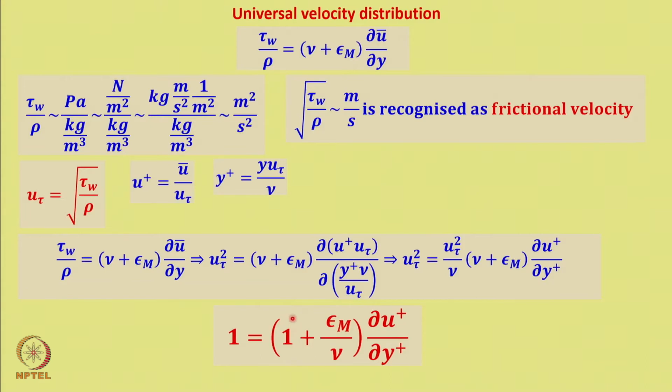Tau wall by rho equals nu plus epsilon m, del u bar by del y. We replace tau wall by rho with u tau squared, and del u by del y in terms of u plus and y plus, and we got this relation. The first term represents the laminar shear stress and the second term represents the turbulent shear stress.

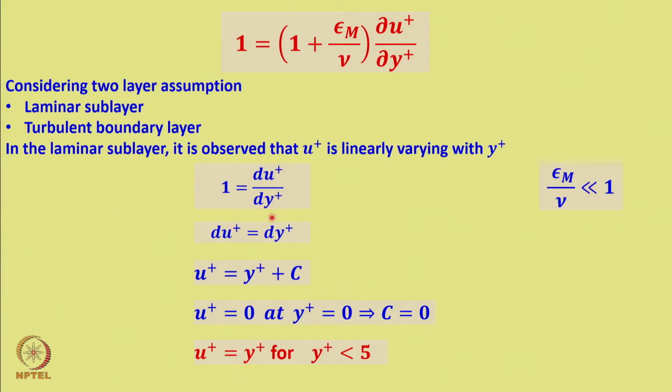For laminar flow, we took a two layer assumption. We took the laminar sublayer and set 1 equal to du plus by dy plus, integrated that, and got u plus equal to y plus.

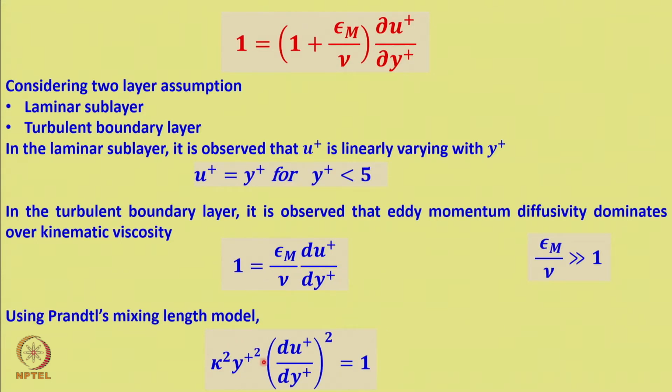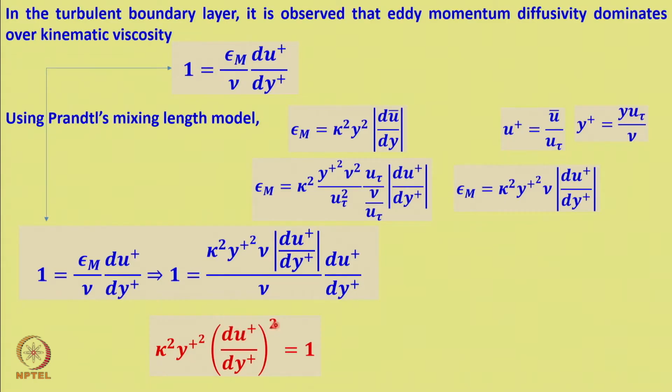For the turbulent boundary layer, we replaced epsilon m with the Prandtl's mixing length hypothesis, that is, epsilon m equal to kappa squared y squared du bar by dy, and replacing that with y pluses and u pluses, we get kappa squared y plus squared nu du plus by dy plus. Substituting this epsilon m in the equation and rearranging, I get kappa squared y plus squared du plus by dy plus, whole squared, equal to 1.

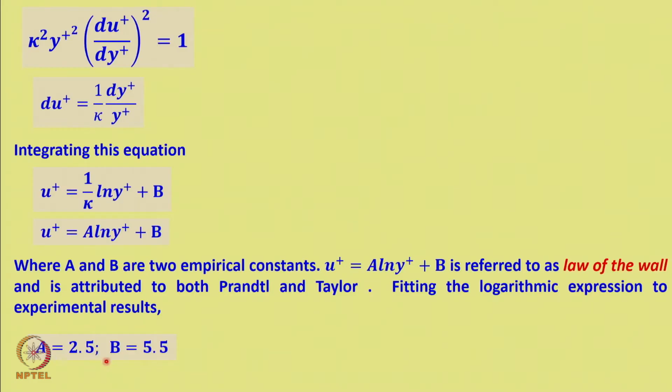If I square root it, I get this equation, and integrating that, I get u plus equal to A log of y plus B, where 1 by kappa is termed as A. So if I take two layers, I get A equal to 2.5 and B equal to 5.5.

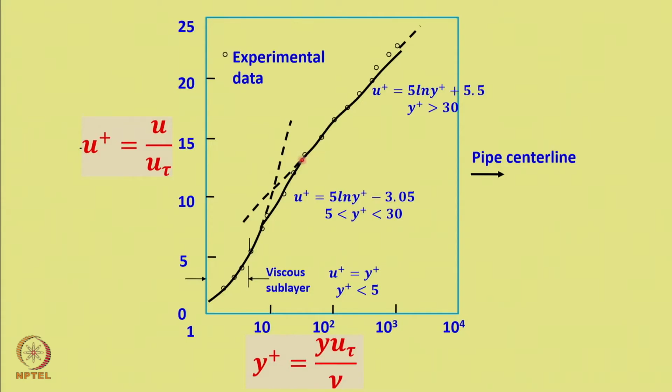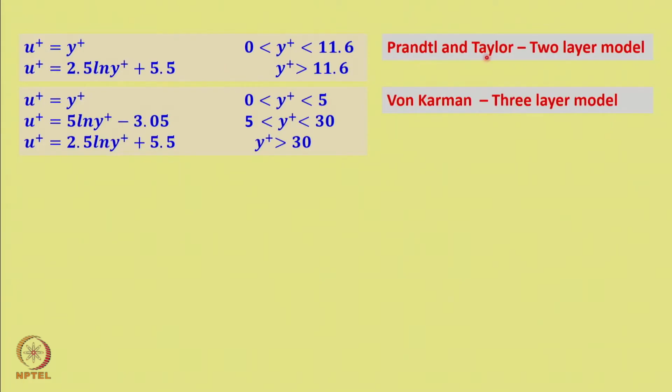This is called universal because it's valid for both internal and external flows. Prandtl and Taylor suggested the two layer model, and Von Karman refined this with the three layer model.

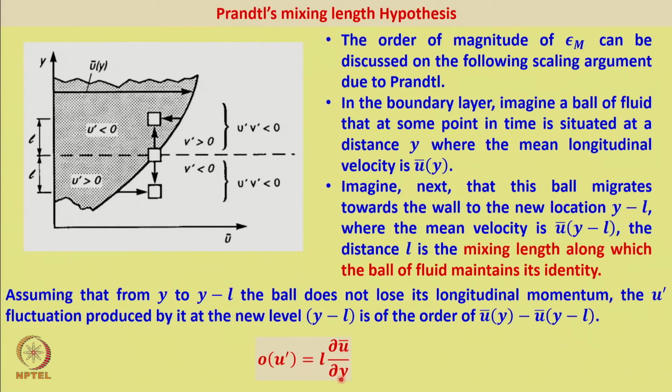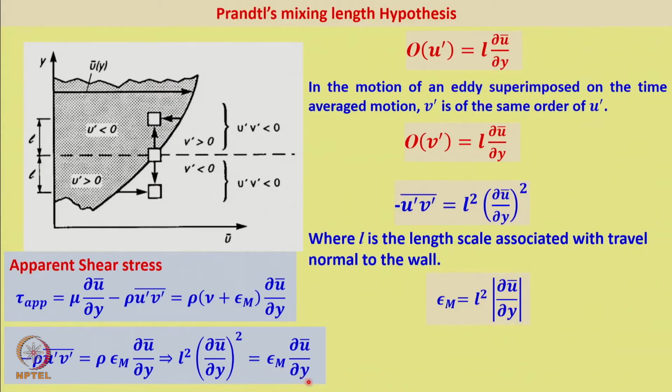In Prandtl's mixing length hypothesis, we said u prime is of the order of L del u bar by del y, and v prime is of the order of L del u bar by del y. So u prime v prime is of the order of L squared del u bar by del y whole squared. Substituting that for epsilon m del u bar by del y, I get epsilon m equal to L squared del u bar by del y.

What should be the scale for L? There is no general rule, but it should be of the order of y, so I write L equal to kappa y. Substituting that, for L squared I get kappa squared y squared, so epsilon m equals kappa squared y squared del u bar by del y.

From experiments, it turns out that kappa is of the order of 0.4, which reconfirms the upper bound for the mixing length.

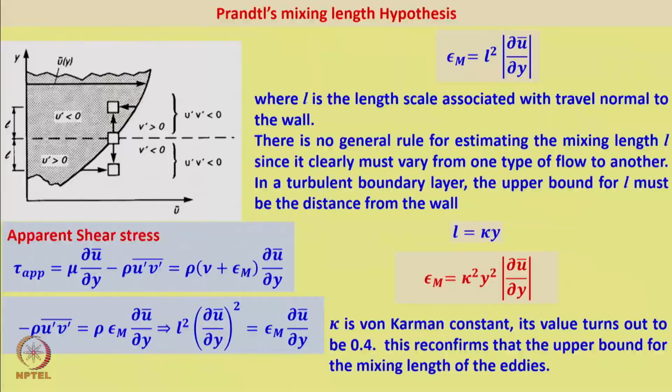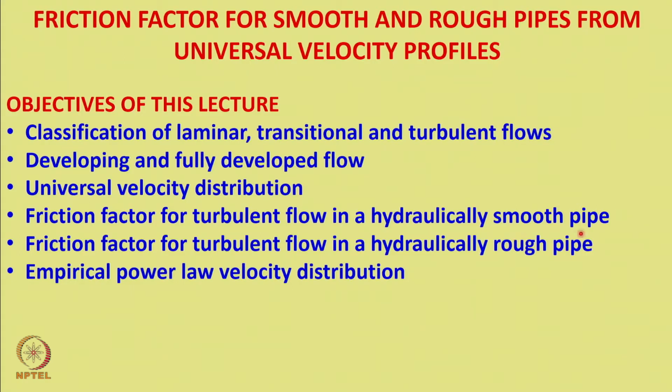Now let us see the plan for the next lectures in this module: we will try to derive the friction factor. Coming to the slides, the objectives of this lecture are to quickly take up laminar, transition, turbulent, developing and fully developed flow, briefly revisit the universal velocity distribution, and derive the friction factor for turbulent flow in a hydraulically smooth pipe. That is the aim of this module.

So we have laminar, transitional, turbulent, and developing flow where the boundary layer is growing until it reaches the center of the pipe—that is called the hydrodynamic entrance length. In the fully developed flow, if it is laminar, the profile would be parabolic; if it is turbulent, it would be a top hat profile or power law.

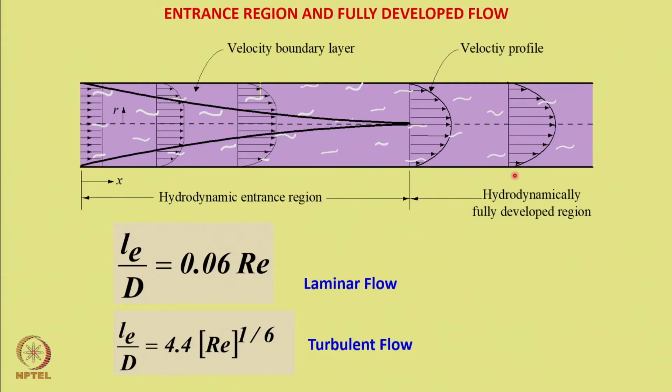So I am going to consider the turbulent velocity profile. In previous classes, Professor Arun taught you how to derive F equal to 64 by Re for laminar flow from the Navier-Stokes equations. Here, we are going to derive it for turbulent flow.

This is just to show the entrance length, and this is the fully developed flow where dP by dx is constant. So the shear stress is quite different between laminar and turbulent flow.

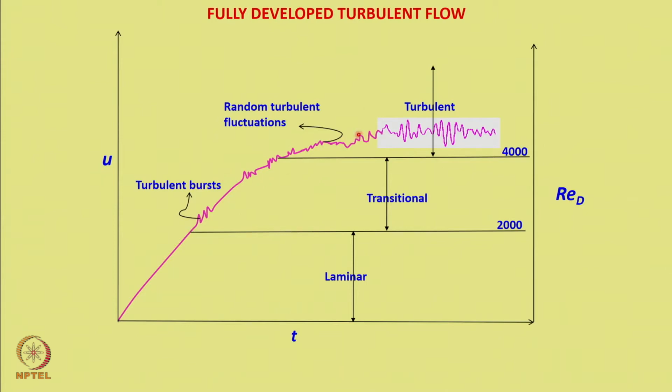We are going to derive F for turbulent flow. This is just to show velocity versus time, where turbulent bursts are present, and in turbulent flow, for Reynolds number greater than 4000, the flow is going to be turbulent.

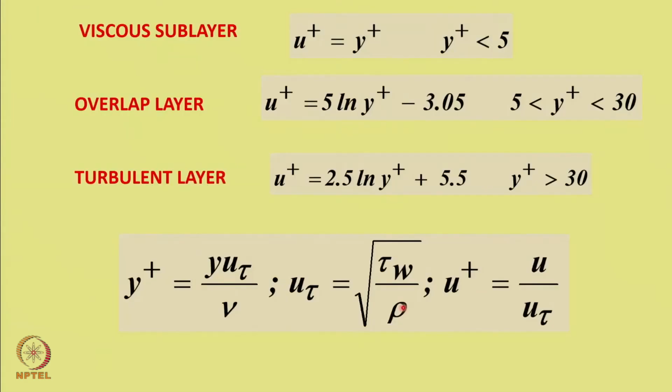So we have gone through this universal velocity profile, which we took up and compared with the experimental data. Now we shall take up the friction factor for turbulent flow.

Friction factor for turbulent flow in a hydraulically smooth pipe. Of course, I have not told what is a smooth pipe yet. Let's consider that there is no surface roughness. For now, let us take this as smooth pipe means there is no surface roughness at all, like a perspex pipe or a glass pipe, you can consider there is no surface roughness. I will define formally after this derivation what is hydraulically smooth and hydraulically rough pipe.

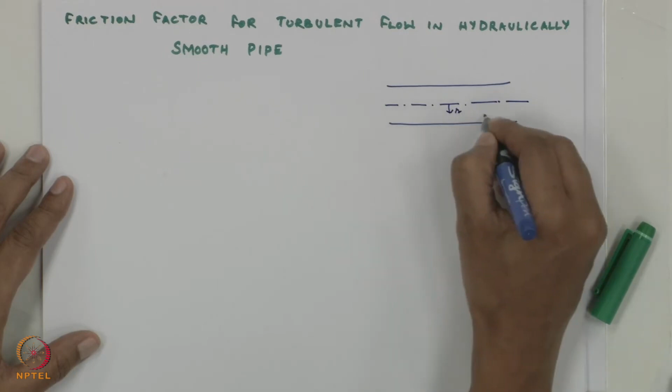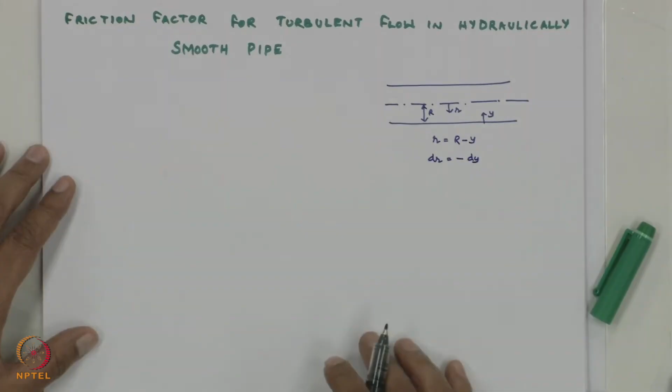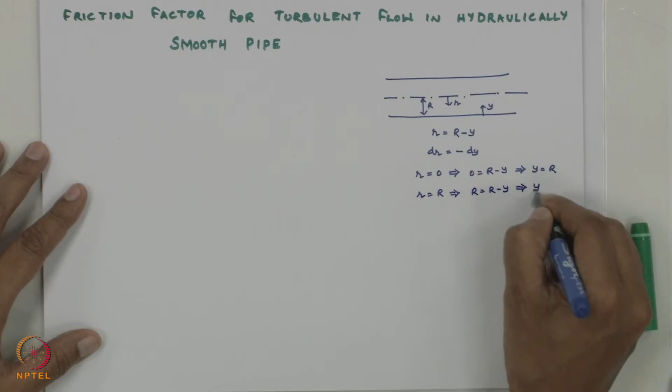So if I take a pipe, this is the r coordinate and this is y coordinate, and this is the radius of the pipe. Now r equals capital R minus y, and dr equals minus dy. When r equals 0, this implies 0 equals R minus y, that means y equals R. And at r equals R, this implies R equals R minus y, implies y equals 0. This is for transformation of coordinates.

So now flow rate Q dot equals pi R squared u average, area into velocity. This is volume flow rate, volumetric flow rate is what I have taken, that is why density you do not see. This is equal to integral of 0 to R, 2 pi r u dr.

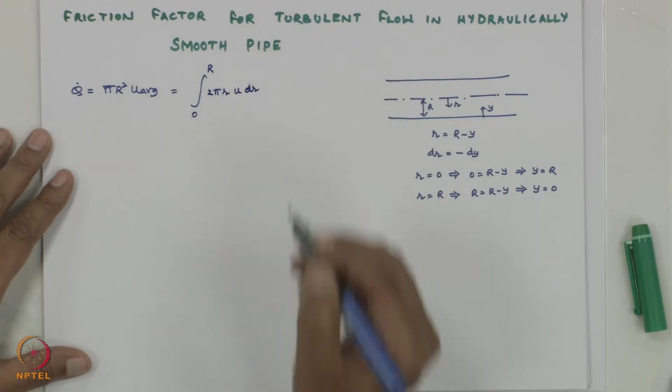How did I write this? I have taken a small elemental ring in my pipe at a radius r. This elemental ring has a thickness dr. So the area of this elemental ring is 2 pi r dr multiplied with velocity, integrated within the limits 0 to R, is my flow rate.

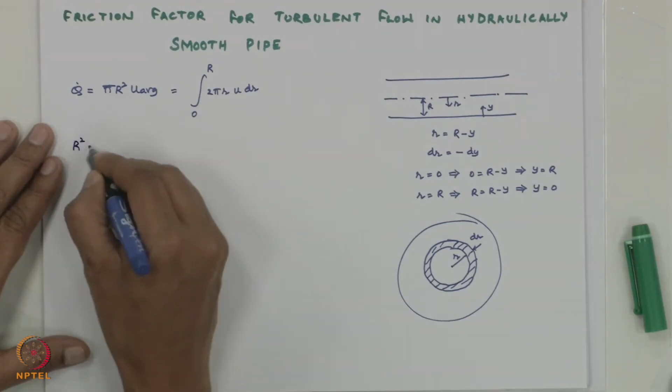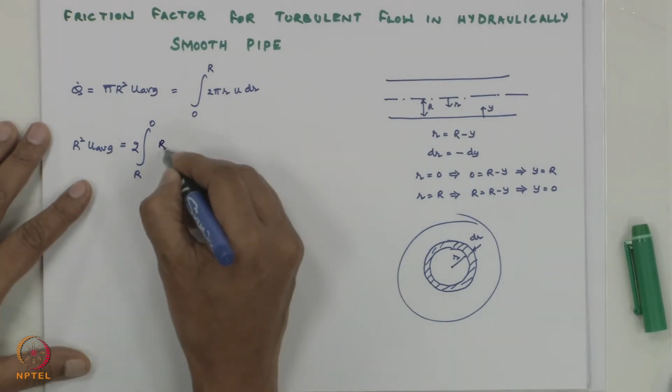Now R squared pi gets cancelled out, so you have R squared u average equals integral of, I am transforming this r into y. So when r is 0, y is R, and when r is R, y is 0. 2 I am pulling out, u I will retain as it is, small r becomes capital R minus y as I have shown here already, and dr is minus dy. I will absorb this negative sign by flipping these limits. So R squared u average equals 2 into integral 0 to R.

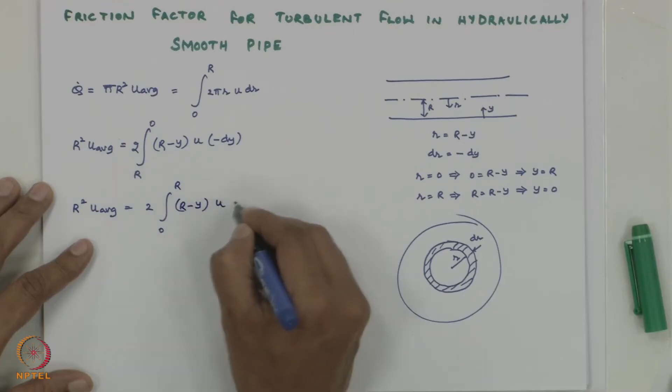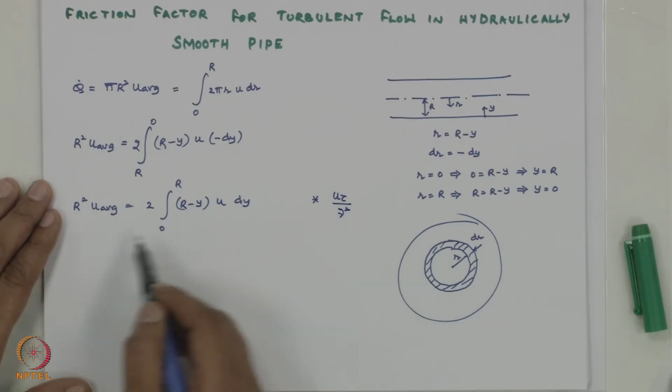Minus y, u, dy. Now multiply both sides by u tau by nu squared. My next aim is to convert this, transform this in terms of u plus and y plus. Let me tell you what I am doing.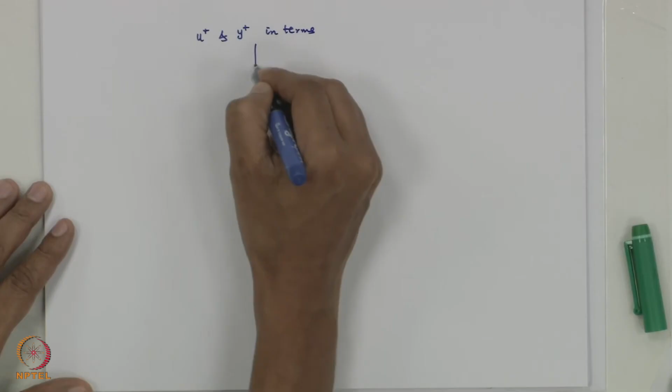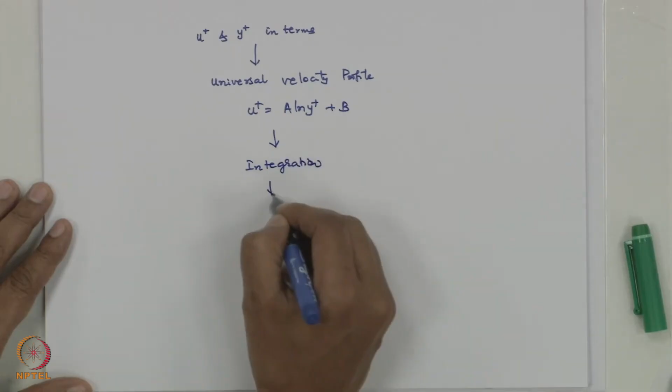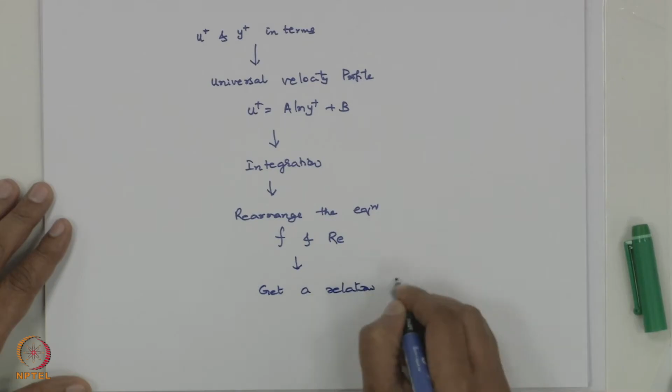I will convert this into u plus and y plus. In terms of u plus and y plus I will write, and take the universal velocity profile, that is u plus equals A log of y plus plus B, do the integration, rearrange this equation in terms of f and Re, where f is friction factor, so that I get a relation for f. This is my whole algorithm, if you want to say, what I am following to derive this.

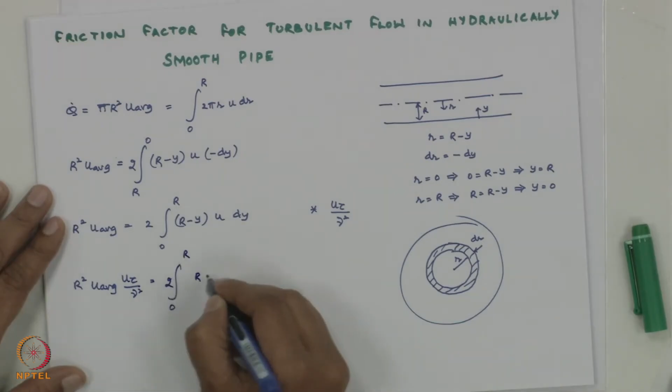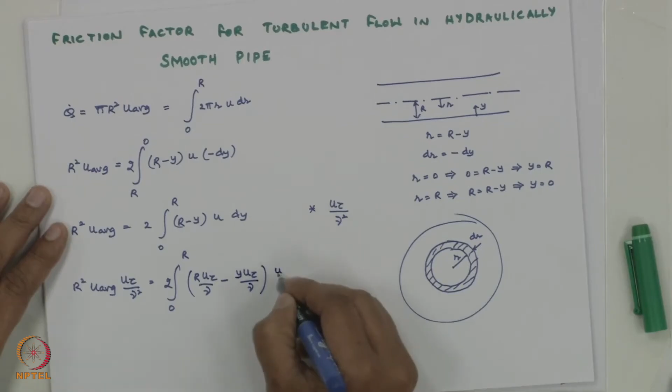Getting back, so I want to write this in terms of U plus, so that's why I am doing a little bit of rearrangement. So R squared U average U tau by nu squared equals integral of 0 to R, 2 is outside, R U tau by nu minus Y U tau by nu, into U by nu dy. Let it be there like this.

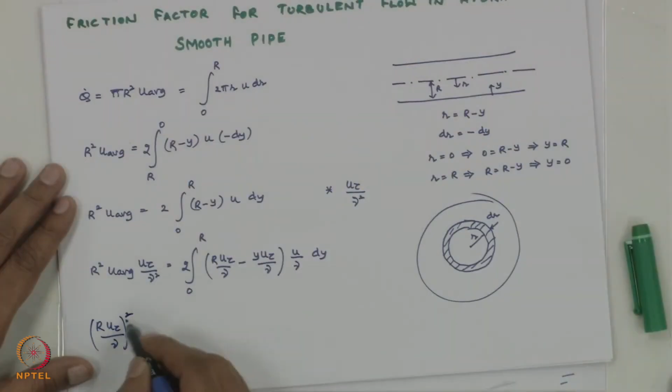Okay, now again, R U tau by nu whole squared, so I have to divide by U tau. You see, I had only one U tau in the numerator, only one U tau, but I have put two U taus in the numerator. That means I have to put one U tau in the denominator.

So this is equal to 2 into integral 0 to R, R U tau by nu minus Y U tau by nu, U by U tau, d of Y U tau by nu. What did I do? This U tau is constant, so it gets cancelled out; nu was there, that nu I have pushed inside. So everything is okay.

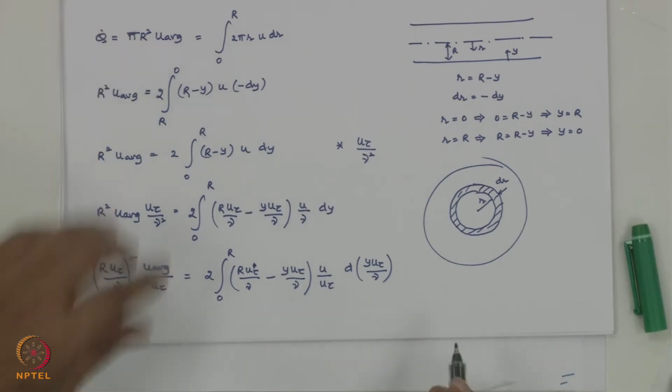Now you can see everything in terms of pluses. So if you recall, what is Y plus? Y plus equals Y U tau by nu, R plus equals R U tau by nu, and U by U tau is U plus. Correct? Substituting this,

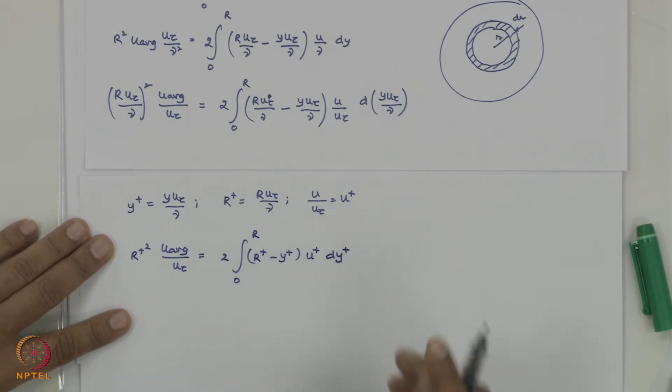what do I get is R plus squared U average by U tau equals 2 integral of 0 to R plus, minus Y plus, U by U tau is U plus, Y U tau by nu is Y plus, so dy plus. So I have successfully converted this within the integral as all U plus and Y plus only. So what was U plus? U plus equals A log of Y plus plus B, where A equals 2.5 and B equals 5.5.

Let me keep it as A and B only for now, and substitute the values of A and B at the end. Now, R plus squared U average by U tau equals 2 into the integral from 0 to R plus of R plus minus Y plus, U plus is A log of Y plus plus B, dy plus.

Now you multiply this out. There's a bit of bookkeeping, but let's do it - I don't want to skip steps. R plus squared U average by U tau equals 2R plus A. If you integrate log x, you get x log x minus x plus c, so you have Y plus log of Y plus minus Y plus within the limits 0 to R, and this limit becomes R plus.

Minus 2A. Now for the x log x integration, you get 2A into Y plus squared by 2 log of Y plus minus Y plus squared by 4.

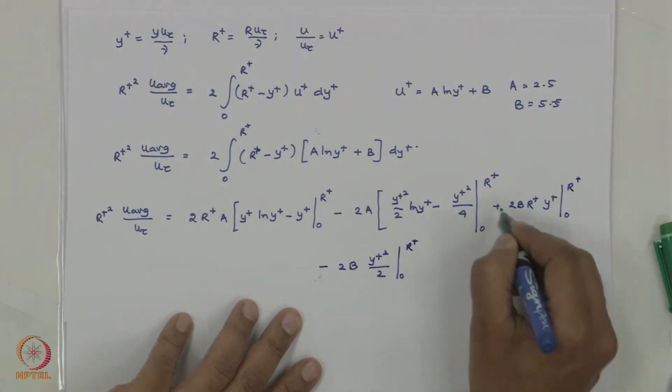So it's simply bookkeeping, but I don't want to skip it because there are subtle nuances in between, so I need to focus on that.

So R plus squared u average by u tau is equal to 2R plus A into R plus log of R plus minus R plus, minus 2A times R plus squared by 2 log of R plus minus R plus squared by 4, plus 2B R plus squared minus 2B R plus squared by.

So for u average, you can see that r plus squared will vanish throughout. So I can write u average by u tau equals 2a log of r plus minus 2a minus 2a times 1 by 2 log of r plus, plus 2a times 1 by 4, plus 2b minus b, 2b into half b.

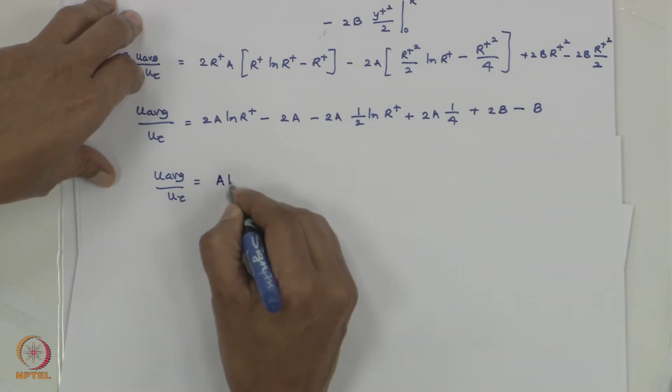So I get my equation as u average by u tau equal to 2a log of r plus minus a log of r plus. So you get a log of r plus minus 2a plus a by 2, so you get minus 3 by 2a plus 2b minus b, you get plus b.

Substituting a equal to 2.5 and b equal to 5.5, you get u average by u tau equal to 2.5 log of r plus 1.75. You just substitute for a and b, you are going to get this 1.75.

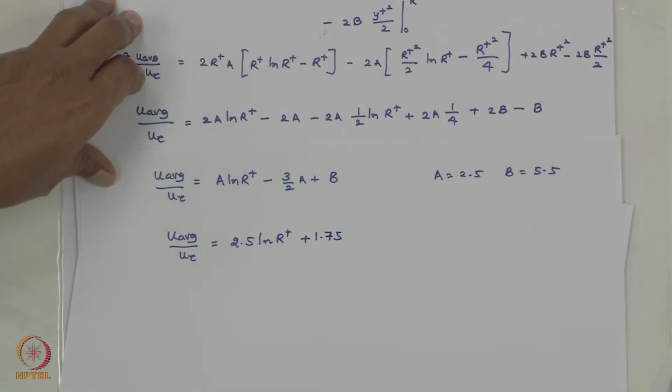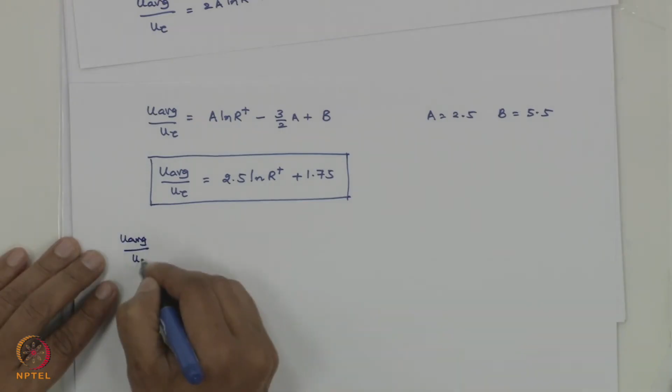Now still I am not seeing Reynolds number and friction factor, right? So let me take up only the left hand side of this equation, that is u average upon u tau. Now u tau is nothing but square root of tau wall by rho. So now 1 upon square root of tau wall upon rho u average squared.

I have just taken the u average in the denominator. So if you recall, Cf equal to tau wall upon half rho u average squared - that is my definition of Cf. So that means this becomes square root of 2 by Cf.

2 by Cf, that is tau wall by rho u average squared is equal to Cf by 2. So that is Cf, but F equal to 4 Cf. So if you substitute that, you get 8 upon F. This is my regular friction factor which comes from my Darcy-Weisbach equation.

If you want to recall, Hf equal to Fl V squared divided by 2Gd. So that is rho GHf, that is delta P, rho G, Fl V squared divided by 2Gd. Here V is nothing but U average. So the g's get cancelled out.

So you get F equal to delta P upon half rho U average squared into D by L. This is the friction factor definition, in case you have forgotten.

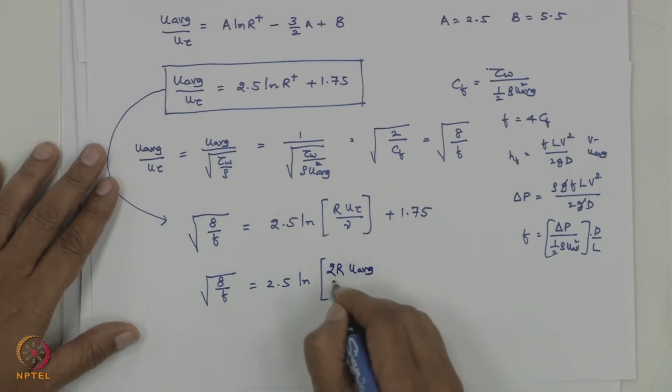So the left hand side of this equation becomes square root of 8 by F equal to 2.5 log of R u tau by nu plus 1.75. So square root of 8 by F equal to 2.5 log of R, 2R u average by nu, into u tau by 2 into u average. I just multiplied and divided it by 2 u average.

2r is nothing but my diameter. Whole of this is nothing but my Reynolds number based on diameter, and u tau by u average - just now we have found that equals square root of f by 8.

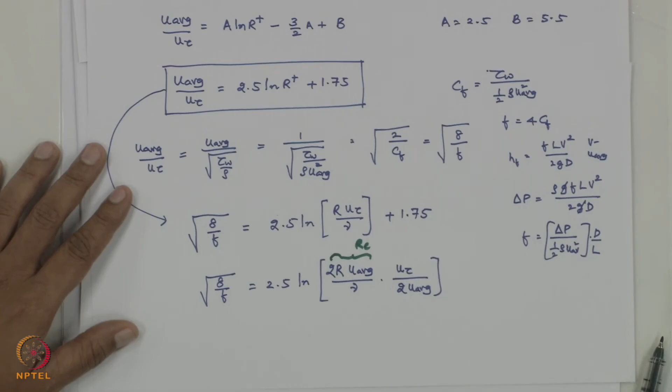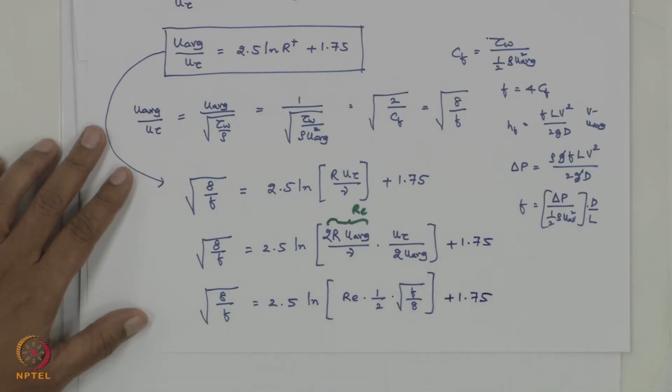So if I substitute that, I get square root of 8 by f equal to 2.5 log of Re into half into square root of f by 8, plus 1.75. So if I divide throughout by root 8, since I want only 1 by root f on my left hand side, I get 1 by root f equal to 2.5 upon root 8 log of Re into half into square root of f by root 8, plus 1.75 by root 8.

So if you do this, you get 1 by root f equal to 0.8838 log of Re square root of f, plus 2.5 by root 8 log of 1 by 2 root 8.

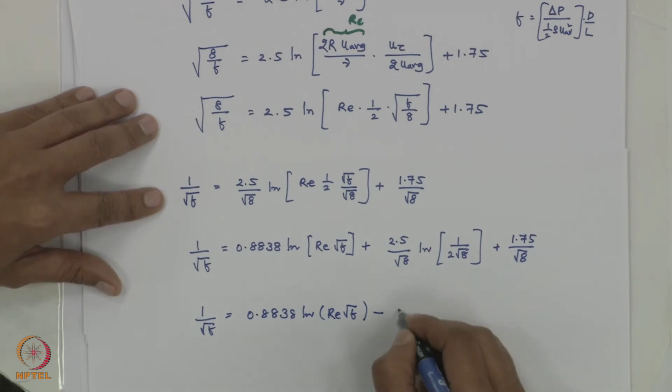I have just taken out these constants, log a plus log b. Log ab equals log a plus log b, I have just put that, plus 1.75 by root 8. So you get 1 by root f equal to 0.8838 log of Re root f equal minus 0.9129, that's what you are going to get.

Okay, so now minus, when you take log and all, you will get this. So where did the minus come from? It comes from log, so you don't have to worry.

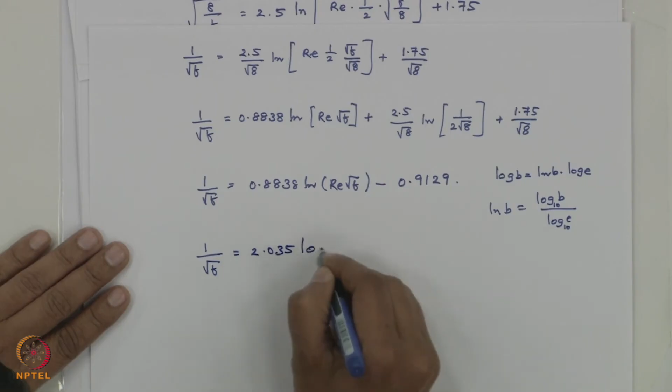But now I want to convert this natural log to logarithm to base 10. So log b equals log b into log e, that is log means to base 10 by log e to base 10. If you do that, you get 1 by root f equal to 2.035 log of Re root f minus.

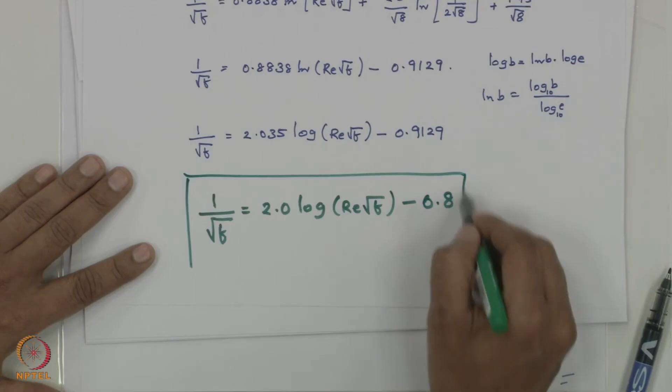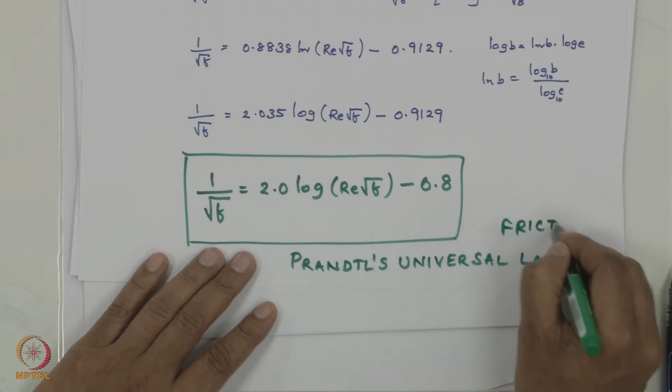This is called Prandtl's universal law of friction, because it is coming from the universal velocity profile, and it has been verified up to 3.4 into 10 to the power of 6 Reynolds number.

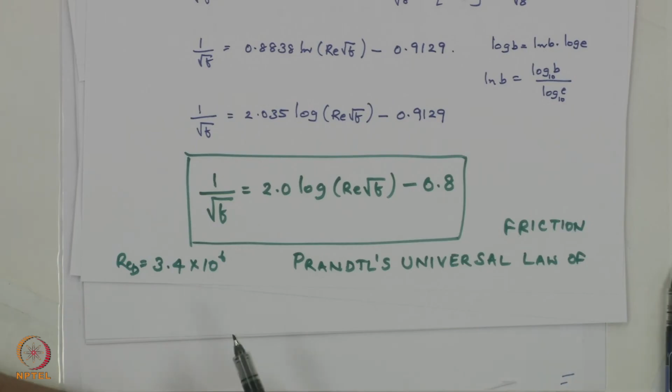It can predict well. Only thing is that this is implicit, meaning f is there both on the left hand side and right hand side. You have to solve it by trial and error. However, it works very well.

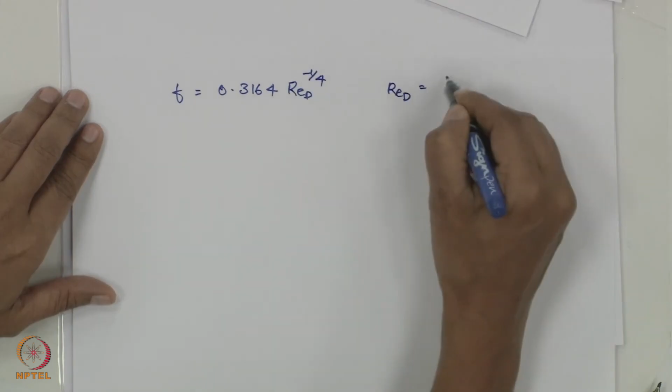So now if we come to the slides, Blasius on the other hand just did a simple curve fit, that is f equal to 0.3164 Red to the power of minus 1 by 4, where Red is u average d upon nu.

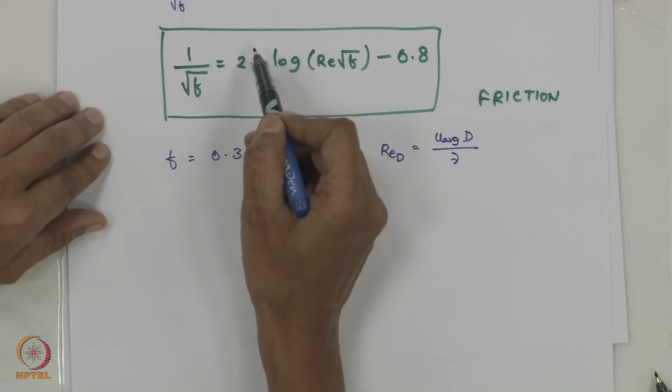So you have two equations. One is the implicit one, which is derived from fundamentals, though that is also semi-empirical, and this is purely empirical.

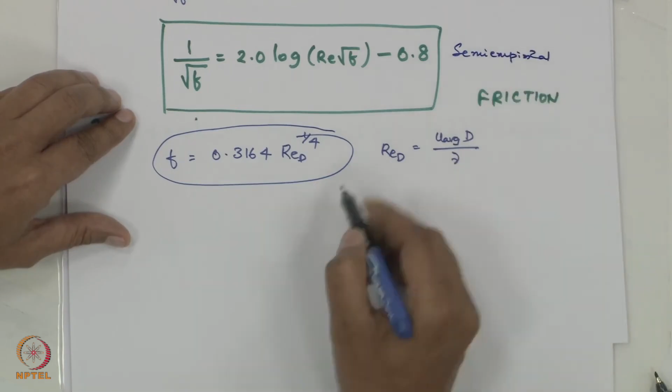If you see the slides and the comparison of data, Prandtl's equation and Blasius's equation are almost the same, they are comparing well. Of course Blasius's equation will have experimental uncertainty, we need to remember that, and it works very well.

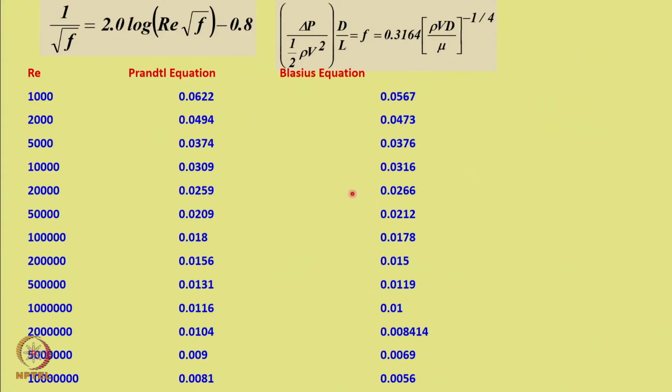So to recall, Prandtl's universal equation agrees well with Blasius's equation up to Reynolds number of 1 lakh, but at higher values, Blasius's equation deviates progressively from the measurements, while Prandtl's equation maintains good agreement.

Blasius happens to be the PhD student of Ludwig Prandtl. In fact, the similarity hypothesis you studied for the flat plate was his PhD work. Nikuradse did all his experimental results for hydraulically smooth and rough pipes, based on which Prandtl's semi-empirical equation was compared, and these constants 2 and 0.8 were fine-tuned.

So I would strongly recommend you read these two papers, by Hager, 'A Life in Research and Education' on Blasius, in Experiments in Fluids, and again by Hager on Nikuradse, 'Hydraulic Experimenter', in Journal of Hydraulic Research. Please read these papers and encourage your students to as well, because it gives historical perspective on how things have emerged and how we understand them today.

Interestingly, in 1998 at Princeton University, they redid all these experiments comparing the universal velocity profile, and found that these constants just had to be fine-tuned to extend validity not just to 3.4 into 10 to the power of 6 but to 35 into 10 to the power of 6, changing the constants to 1.92 and 0.475, that is minus 7.05 upon Re into root f.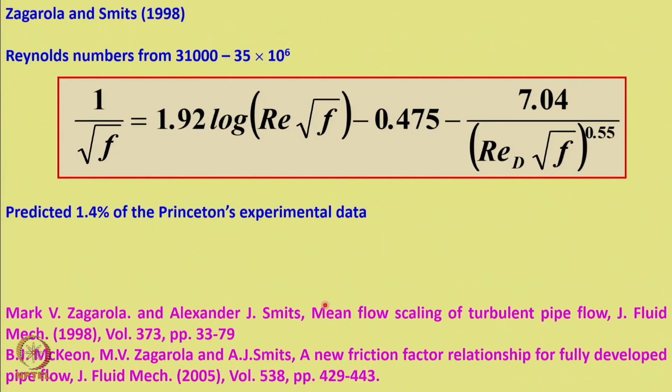So these two papers I would strongly recommend you read, and in the next module I will explain what is hydraulically smooth and hydraulically rough, and then we will derive the friction factor for the hydraulically rough pipe as well. With that module we would complete the utility of this universal velocity profile with the integral parameter, that is F. Thank you.